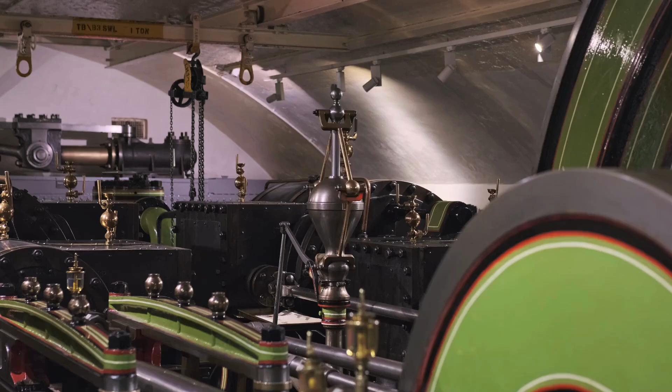I'm going to start making some more pieces for my project today. This involves, for the milling machine, 2 bushes and operating the four-jaw to machine a boss on a rectangular piece of aluminium. So there's quite a lot of different processes on these 2 pieces.

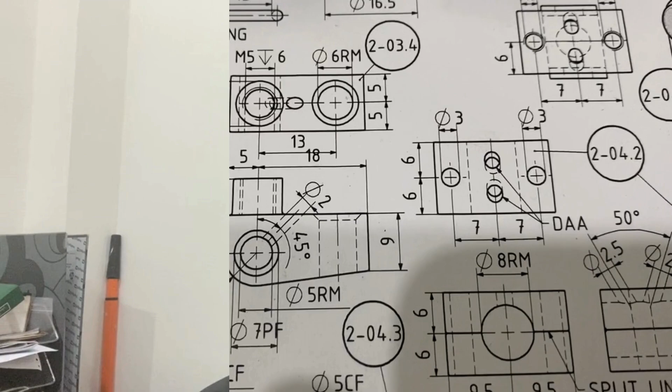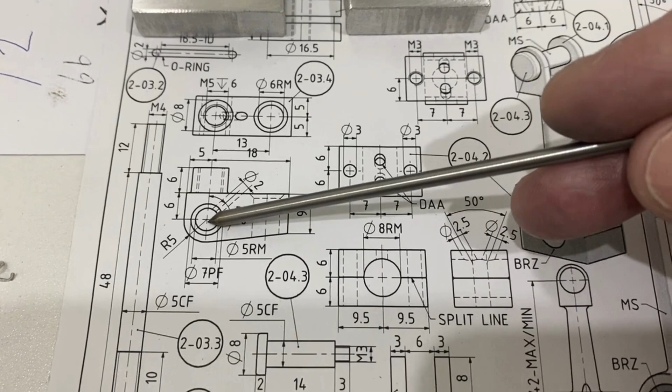There's a brass bush, there's a round spigot to be machined in the four-jaw. There's a 6mm reamed hole, this is where the brass bush goes. It's a 7mm by 5mm brass bush, and we've got a 2mm oil hole all through at 45 degrees going into the brass bush.

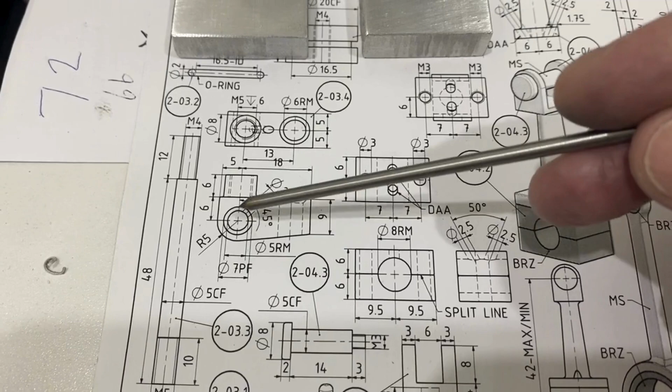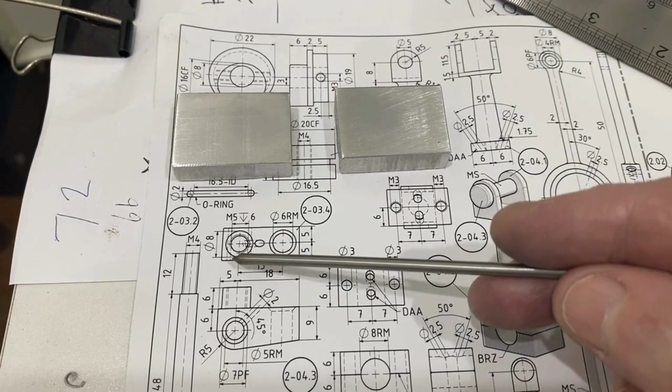Yep, so that's a 5mm hole, and the piece is going to be made from aluminium. These are both aluminium pieces that I've prepared ready for the piece, and that's the top of the piece. So there's going to be lathe work and milling machine work and some drilling and reaming and some filing and polishing.

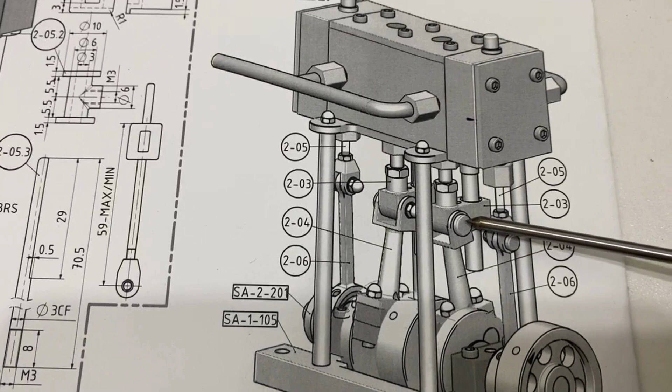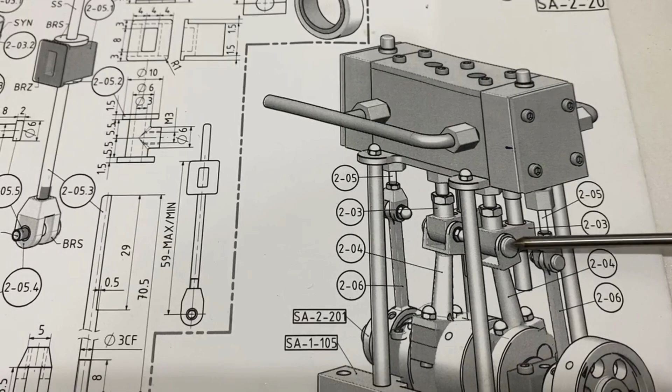So let's go to the piece, what it actually does. That's the 6mm hole, reamed hole, which is the guide, and there's the pin that will go through the brass bush, and there's the 5mm locking nut for the piston rod, and there's the part which drives the piston, and then there's the crank rod connected to the crank, and there's the pin that's going to be lubricated.

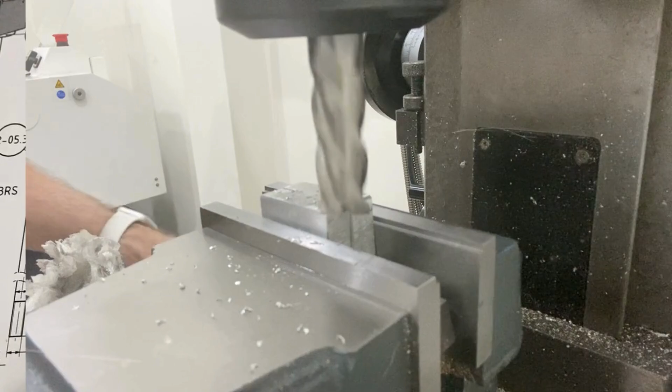So let's go to the first operation, where first of all we're going to machine a square surface. We're just going to clean the surface up and make it nice and flat.

Then we can turn the piece round and machine it to 17mm width. So we're just taking the clean up cuts, and I'm holding both pieces in the vise because they're nice surfaces, the 2 flat surfaces.

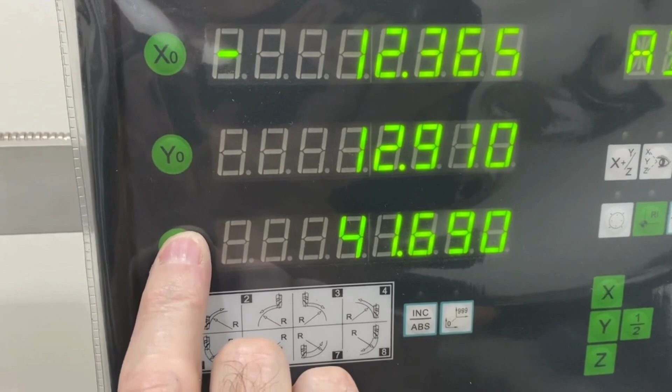So now we've turned the piece round and we're going to skim the surface, and once we've cleaned that surface, we're going to take a measurement and set the Z-axis to 0, so that we've machined the surface, measured it, and now we're setting it to 0 for the depth.

So we've roughed that out now, and we've taken it to its final cuts. And then we'll move to the next operation.

I'm currently using a 16mm end mill. It's a mini mill machine, so I found that the 16mm end mill is quite sufficient.

So now we're going to clean these surfaces up using the side of the end mill. We can't take big cuts with this, so we're just giving these surfaces a clean, and then we can place them on a parallel in the vise and use the bottom of the end mill, which is a stronger cutter.

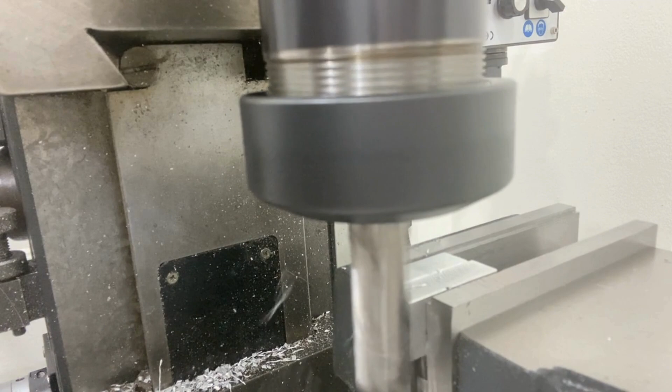So this is just cleaning up these faces now. As you can see, we're holding both pieces together in the vise. And now we are going to machine to the 23mm length, placing them on parallels, and we're currently able to take a 2mm cut.

If we were using the side of the end mill, it would mainly only take up to 0.5mm on the mini mill to be on the safe side, but we've been able to bring it down to size.

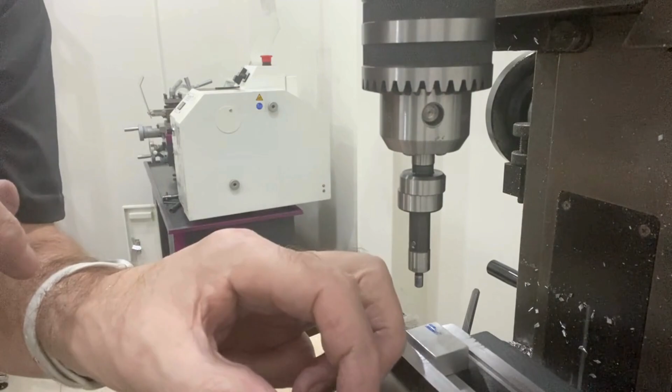Okay, so we've machined all the sizes required, and now we're going to drill the hole for the bush.

So we placed the item in the vise, and we've used a parallel to line the piece up in the vise, so once we've set the dimension, we can repeat the operation by just placing the next one in the vise and using the parallel to line it up to the end of the vise.

So we've marked the piece, and we're going to move it to the correct position. Now I tend to do this twice, so I'll let it offset itself and do it twice, and set it to 0, do it again and see if it comes to 0, just to be on the safe side. So now we're in the right position, and now we're going to drill the hole in the workpiece.

As you can see, that's lined up with the end of the jaws, so the next piece will go to the same position. I currently don't have a 7mm reamer, so I'm drilling it 6.5 and then I'm going to drill it to 7mm. So I'm going to use the drill because I can machine the bush to fit the hole.

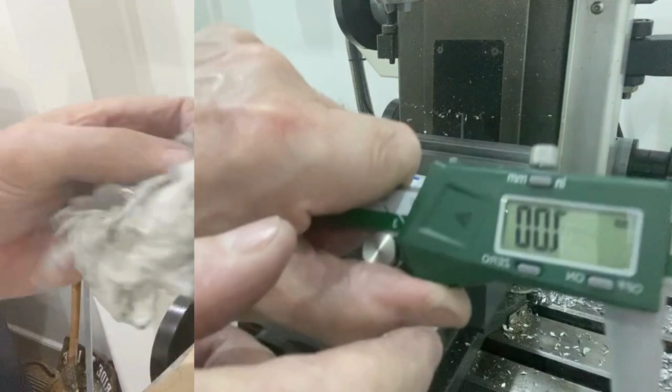Although sometimes doing it this way it is quite accurate. So now we're going to use the 7mm drill to go through for the bush. And just out of interest, we're going to measure, and as you can see, 6.99 to 7mm. It's actually drilled very accurately.

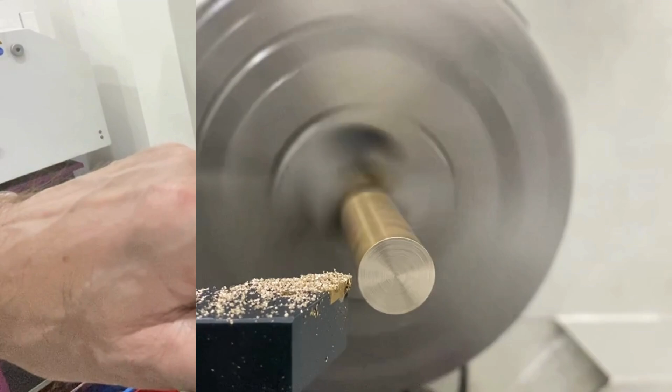And so the next piece will just go in the vise and be lined up and drilled the same.

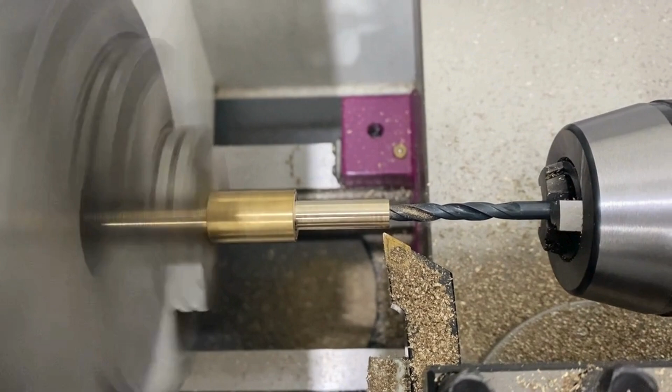So now we place a piece of brass in the lathe. As you can see, we've set the lathe tool up to the centre, faced off, and I've roughed the diameter down to about 7.5, and I'm currently drilling the hole.

So I'm drilling a 4.5mm hole in, and then now we are doing a final cut. So we've measured, we're just doing a final skim on the outside diameter after we have drilled it, just to make sure we've got it nice and round.

And then when that's complete, we will clean that face up with some emery cloth.

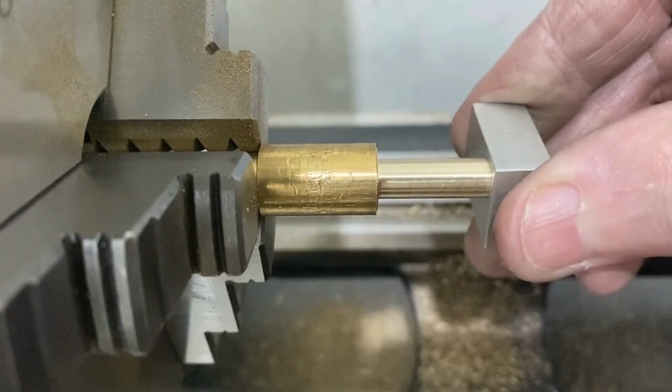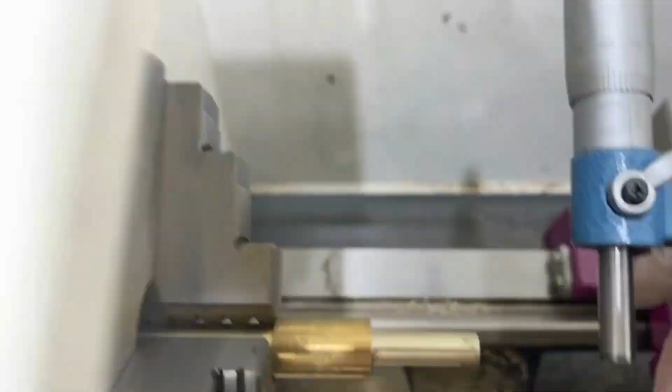So we've cleaned the face, so we're going to offer the piece up now. We've just started, just made a little taper there. We're just going to measure that, and as you can see, that's within half a thousandth of an inch of 7mm.

And we've got a little taper of 0.04. Okay, so that's good enough to press in.

So now we're going to, as you can see there with the Allen key, I tend to tighten the cross slide up to stop any vibration when we're parting off, and it always helps on the mini. So okay, we've parted off.

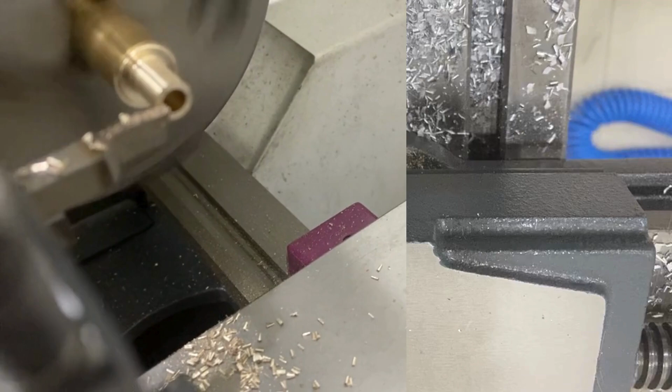And now we're going to press the bush in using the vise, and there we go. So now we've got the bush pressed in.

About 0.02 and 0.03 taper, so it's an interference fit.

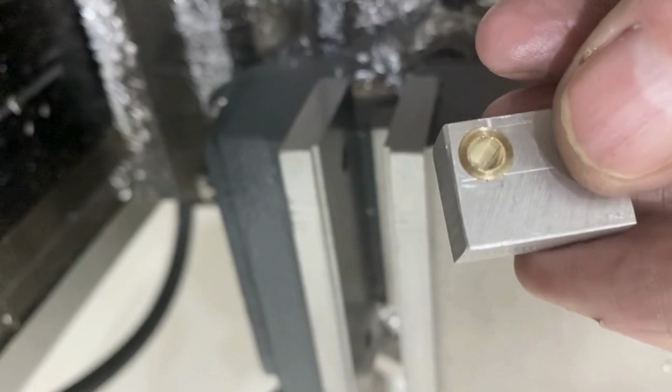So now we're going to place back in the vise into the same position we had before, because we've not moved the milling machine, so we're setting it up in exactly the same position as the drill was in.

We've not moved any settings, and we're going to just ream this to 5mm. So we've got a 5mm reamer, and we're just going to go through, and so we've got the same position, it's all stayed the same, it's just to save time, and we're just going to go through with the 5mm reamer.

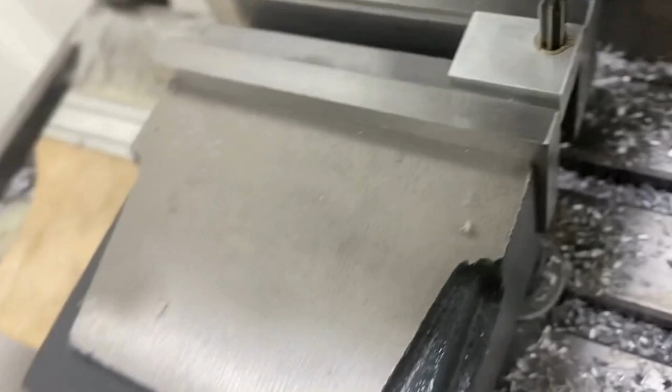Oops, so we just need to move the parallel. That's gone through nicely, so we'll do the other one as well with the same setting.

Now we're going to machine the step so that we can turn the bush. So we're just milling the step out so we can.

Then the next stage will be the 4-jaw. Again, just using the 16mm end mill. I'm taking shorter cuts off here, only taking about 0.5mm cut.

I'm holding in the jaws, no parallels, it's just in the cutout in the jaws. So I'm just being careful with the step.

We'll just machine that, and then this will be ready to go into the lathe with the 4-jaw chuck.

So we're nearly there now. So currently we've machined all the sides, and we've fit the brass bush, that's all completed.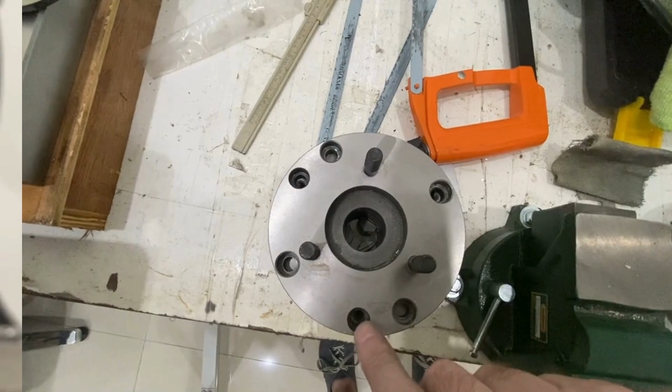So currently we've taken out the 3-jaw from the lathe, and we're fitting the adapter plate to the 4-jaw. And the 4-jaw's got different hole positions. As you can see there's 3 holes for the 3-jaw, and there's 4 holes for the 4-jaw. So we've fit that to there.

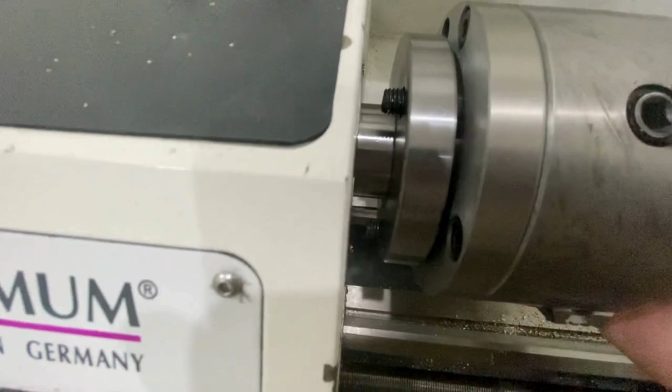So now we've changed the adapter to the 4-jaw, and so now that fits onto the lathe like that. We will have to bring that off a little bit to get the washers and the nuts in, but I'm just showing how quite comfortable it is to change.

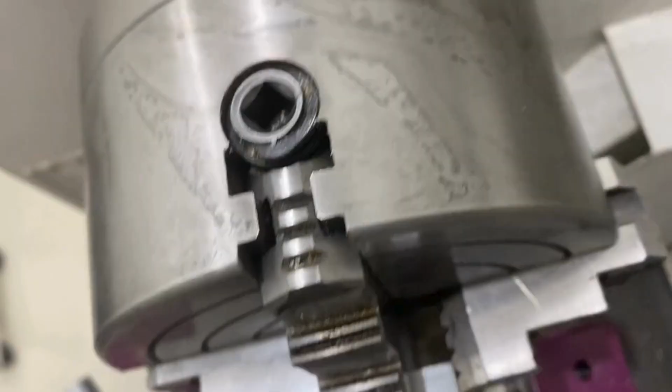Okay, so now we've got our piece in the 4-jaw, and we're just making each side equal. It doesn't have to be mega accurate, it's only a boss, it doesn't meet up with anything, so we're just going to make each side equal.

As you can see there, just with the lathe tool, and then we're going to finish machining that down. Well, that's worked out okay.

Carefully just skim out, then it's all equal.

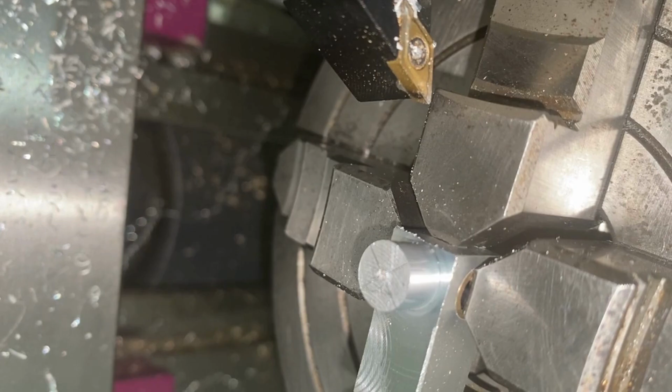And there we go, we've got our stub machined, and then now we just put in the 6mm reamer through the piece, and then here we go, we've got this angle to machine now.

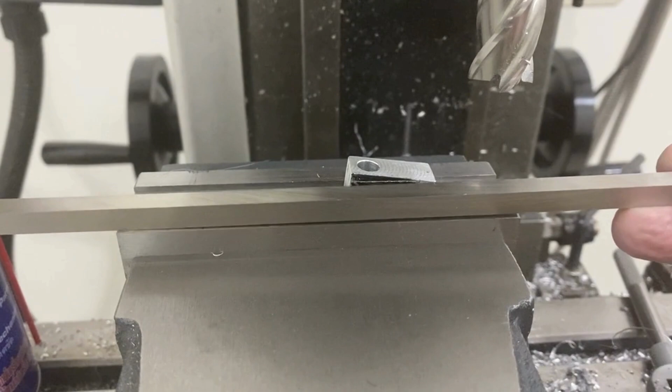So I've marked the angle and I'm currently just lining it up with a parallel.

And we've just machined down to the line. It's not really important, it doesn't have to be dead accurate, and also I can file it.

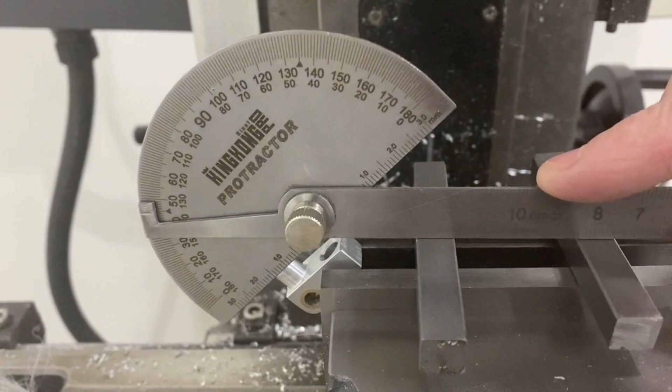Okay, so now we're going to drill the 2mm hole at 45 degrees into the brass bush for the lubrication of the crank pin that's going to go through that bush, so we can place some lubrication into it.

I'm currently using a 4-flute slot drill, 2mm, because we're going in at an angle, so it would push a drill off. So carefully gone into that, and what I did was I just lined it all up by eye.

Into the centre of the brass bush, and then moved over into the centre of the workpiece and carefully just measured it. Practically did it by eye, it's only to lubricate, but it seemed to work out okay.

So we're going through the aluminium now. I think we've come, can you see the brass? The brass is coming out now, so we're going into the brass bush.

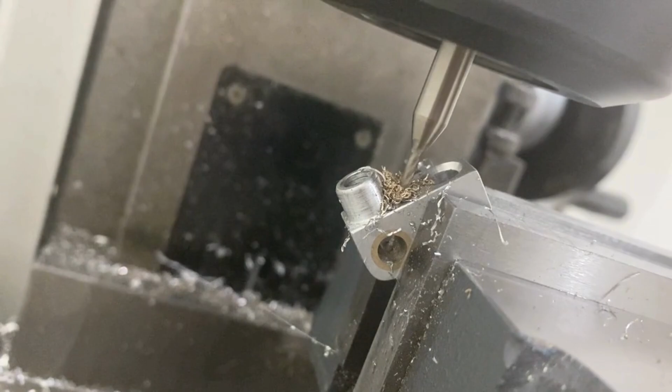So we're just going to go through the brass bush now. Okay, sorry about the angle there, but yes, so we can see all the brass and aluminium.

Oops, apologise about that. As you can see, we've got the hole through now at 45, and just repeat for the next one.

So these are the two components. With the needle file, I've filed the radius, and I've cleaned and deburred, and you can see the oil hole all through there at 45, and the 6mm reamed hole, and the M5 hole there in the top.